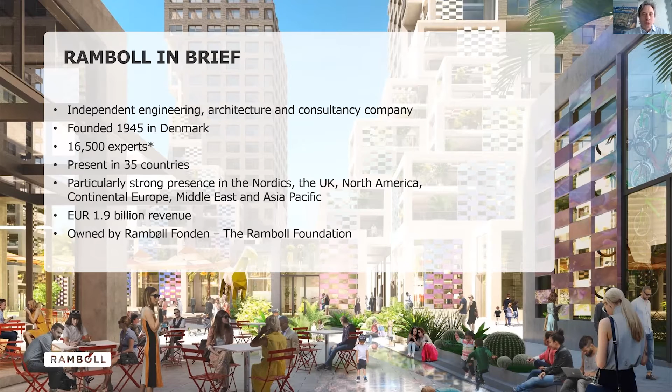And again, I'll just repeat what you said, that Ramboll is a company founded in Denmark in 1945, so 75 years ago. And we have then grown to many countries in the world. We are designing buildings and infrastructure for transport and for energy and for water. And we are working a lot also with the environment and health issues of the world. And we have a management consulting arm to help us with the business aspects of all these issues.

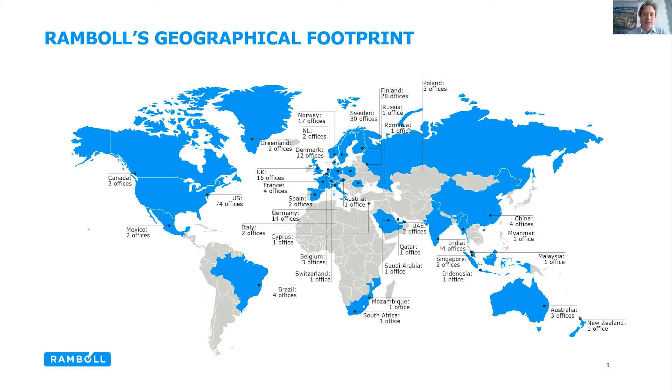I'd like to start by setting the scene. So when we design buildings today and for the last couple of decades, we have tried to do it as sustainably as possible. And in order to balance all the different aspects of sustainability, we typically use some of the certification schemes like BREEAM, LEED, or DGNB. And there are 40 or 50 other similar schemes around the world. What they do is that they list typically all the aspects of sustainability, which is different from country to country. So that's why we have so many different schemes.

And then basically in the design process, we try to achieve the best possible performance within each of these aspects. And then the scheme will give you points. And when you collect points at the end, you achieve a rating. So a rating of maybe silver, gold, or platinum, or whatever the different schemes are using as a rating. And this is really great.

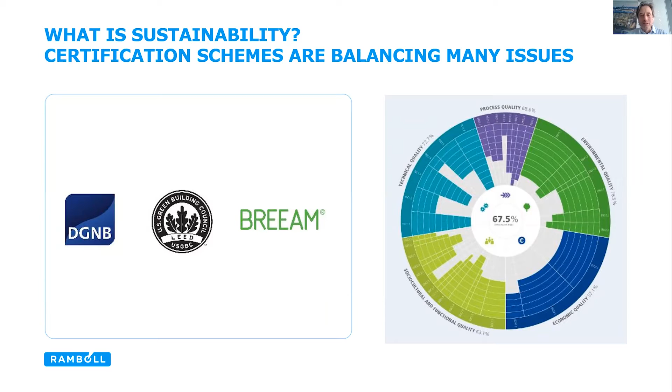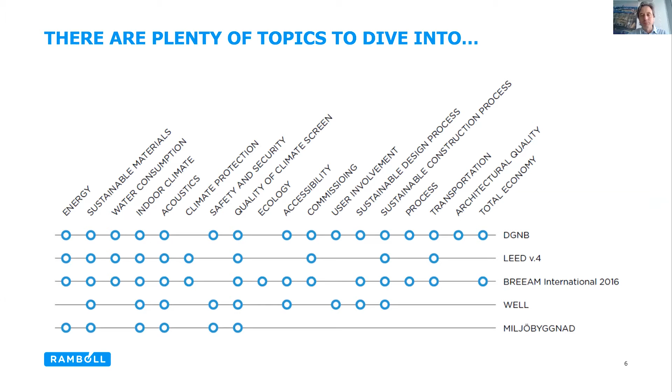You can see also on this overview that some of the schemes emphasize the environment. Others are more holistic and take everything, including social and financial sustainability, into account. So there is no one definition of sustainability because it changes from country to country, it changes over time also. And so we also know about the UN sustainability goals that were introduced in 2015. And again, these are for 15 years. I'm sure that when we reach 2030, it will be different goals that we will be focusing on.

Because, you know, when we focus on solving a problem, very often we succeed in solving that problem, and then we go to the next problem to solve, and then it's a different problem that is the biggest problem. So basically, in the 25 years of my personal experience of designing buildings, things have changed all the time. And we've had a decade of focus on operational energy.

We are now entering a new decade where we may focus on what we call embodied energy or embodied carbon. We will also focus on resources, so that's kind of the circular economy agenda. And we might, you know, in the future find other issues that are going to be more important than the ones we focus on at this time.

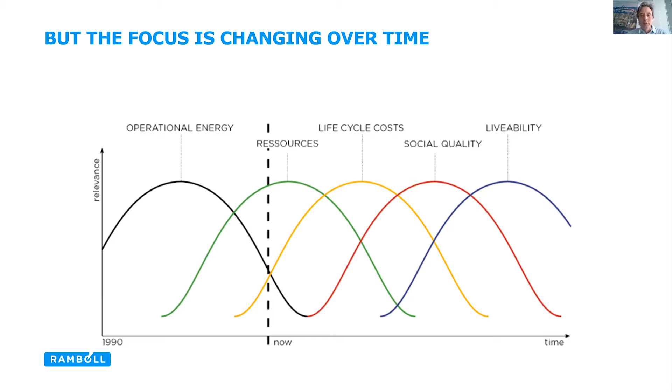So I ask myself whenever I start a new project, you know, what is it that is most important for the client at this point in time? And so we do this sustainable buildings market study every second year. We've just completed a new one, which will come out next week for all to read.

What it does is it asks a number of questions to more than 1,000 property owners that we work for. And then we ask them what is important for the time being. And what I can disclose at this point is that net zero carbon buildings, of course, is a very big topic. And I think that's what we are all talking about. This is what this webinar is about. But also what's coming up on the agenda is circular economy. As a second priority, a lot of talk in the EU about circular economy.

And if you look ahead, we do use a lot of raw materials, and also some of these raw materials are limited. So we really have to think about what raw materials we use in the future. Plus, we generate a lot of waste, and so there is an issue here that we have to focus on also, circular economy.

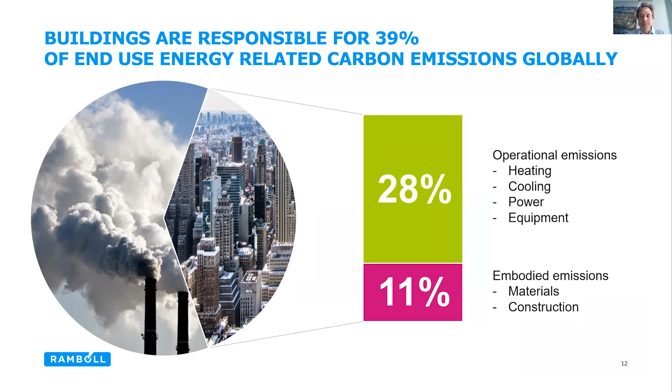The building regulation in 1961 was the first time when we actually set a maximum allowable energy consumption requirement. And then we had the oil crisis, and finally in the last 20 years, we had the carbon emissions, the climate changes and so on. So we had different drivers that drove down the operational energy use in buildings. And so for new buildings today, the building regulation of 2020 has what we call a nearly zero energy buildings standard, a very, very low energy use. And so we've almost solved the problem for new buildings.

But if you look at what we call the embodied carbon, this is all the energy that we use when we produce materials, when we construct and build the buildings, also when we change or refurbish components during the lifetime of the building, when we demolish the building, and when we recycle the materials. There's a lot of energy used and a lot of carbon emissions from that.

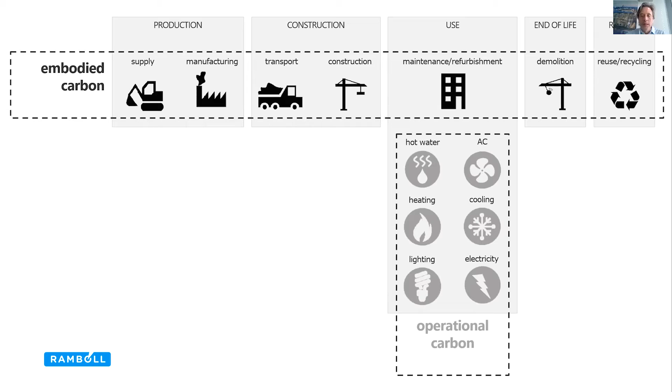So we've looked at all the emissions throughout the lifetime, and this is why it's important that we talk about the emissions per year, because if it's a 50-year lifetime, then we divide by 50. If it's a 100-year lifetime, then we divide by 100.

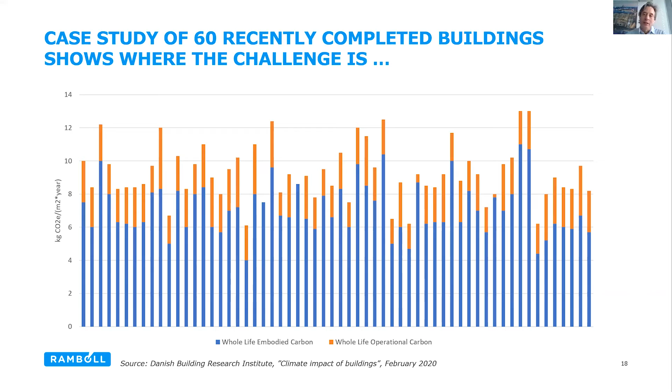I think what is most important here is that the embodied carbon, the blue color, is much higher than the operational carbon over the lifetime of the building. So the operational carbon, because of what I just showed you about building regulation and so on, is going to be very, very low for most buildings. So the biggest problem we have going forward is embodied carbon. And that's why we have to focus on that.

Another interesting aspect of that study we did last year is if you look at the lifetime aspect of these buildings, there's a lot of emissions in the first year, because this is where you manufacture the material, you produce the building components, and you build the building. So that's what is causing a lot of emissions.

And then, every 15 or 20 years, when you do an upgrade of something, maybe it's the mechanical system, maybe it's the internal walls or the facade, there will be additional emissions. And then at the end, when you demolish the building, there are also emissions. It all ends up typically between 300 and 500 kilos of CO2 per square meter.

But what you see here is that there's one building that stands out and that has a negative carbon emission flow, which is a timber structure building. That's because, the way we look at it, when we build with timber, we store the carbon that is absorbed from the atmosphere into this timber. So that's what we call sequestration.

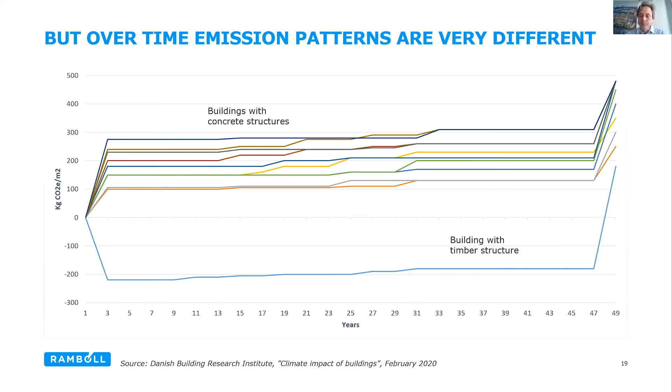If you look at the types of buildings that we have, it's almost the same. It's not exactly the same, but it is almost the same. So for whatever building, you can see here between 300 and 500. So it's not a very significant difference from one type to the next.

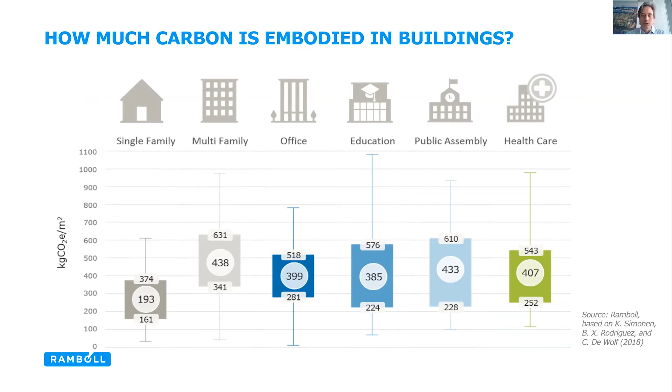What is interesting is in what parts of the building is the embodied carbon, where does the embodied carbon come from? Well, the majority comes from the structure, and because of what I just said, steel and concrete are the main emitters of embodied carbon. But of course, there's also steel and concrete in other parts, and there are aluminum and plastics and so on. So there are a lot of places where we can look.

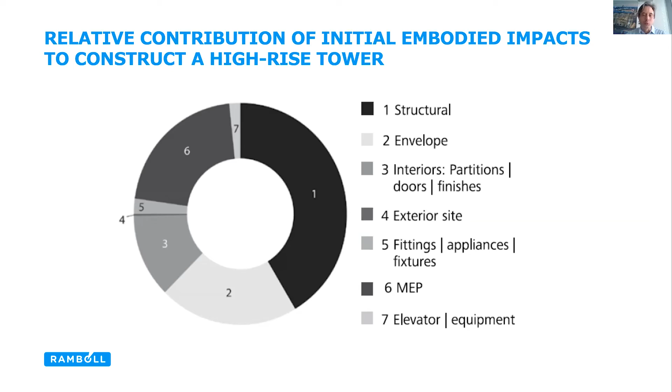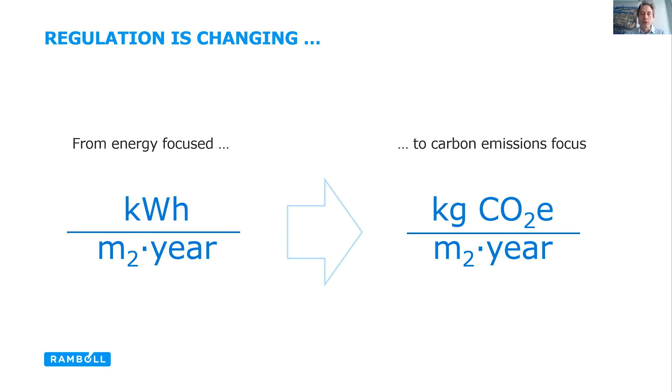So basically, the agenda for when we design buildings has changed. The political agenda has changed. We're no longer so interested in how many kilowatt hours per square meter per year a building is using, because energy is not so much a problem in the future. It's going to be renewable and carbon free and so on. What is really interesting is what are the carbon emissions? So how many kilos of carbon emissions per square meter per year? That's what regulation needs to address.

Two years ago, we worked with the World Green Building Council on a report where we laid out a roadmap until 2050. What is it that we can do to bring embodied carbon on the agenda, to make politicians aware of this problem, to make the whole industry, the designers, the contractors, the building material manufacturers aware? That is the big problem, and that's a report that we produced.

In the report, we suggested that by 2030, all new buildings, infrastructure and renovations will have at least 40% less embodied carbon with significant upfront carbon reduction, and all new buildings must be net zero operational carbon. So the orange part of the chart I showed you before must be zero.

The blue part must be reduced by 40% by 2030. That's a very realistic target, but we need everybody to help achieve that.

And then we said another thing for 2050: new buildings, infrastructure and renovations will have net zero embodied carbon, and all buildings, including existing buildings, will have net zero operational carbon. So that's the ultimate goal. That's the Paris Agreement, and any other agreement that has been made is targeting 2050 as the start of the zero carbon future.

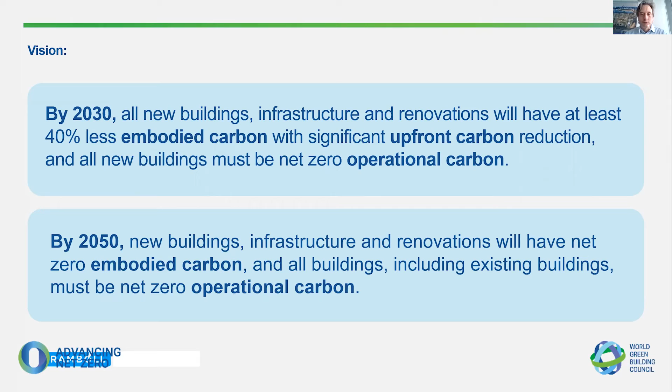We can, what we say, challenge the brief. That is, we can ask questions to the client about what he is building. Is it really necessary to build? Is it really necessary to build with those loads that he has specified, or can we do it in a better, less carbon emitting way?

And also, can we increase utilization of the buildings we design, so that, for example, if we design a school, it's not only used for a school, it's also used for something different in the evenings, so that we don't have to design so many buildings, so many square meters of space. We have to be very conscious what we build and stop building what is not necessary.

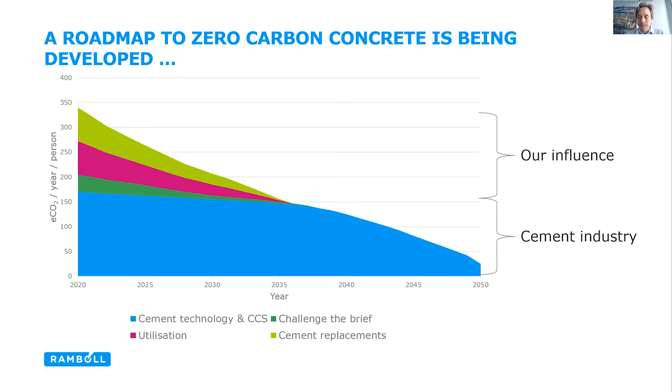And it is almost a one-to-one replacement of a concrete structure, which would be the traditional way. Especially in the Nordics, we use a lot of prefabricated concrete, but we can replace all of those with prefabricated timber, CLT.

So I want to just touch quickly on what is happening in different countries. This is going to be fast because I don't have the whole day. So Denmark is planning to introduce regulation in relation to CO2 emissions. There is still a challenge in terms of getting data: how much embodied carbon each material contains, and all of that has to be calculated and declared. So we have a couple of years to do that, and then the new regulation will go into force.

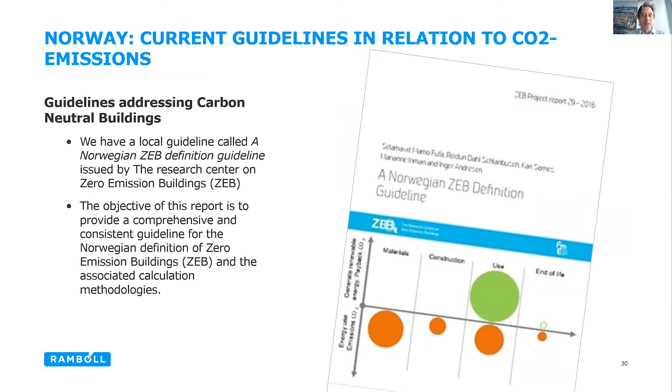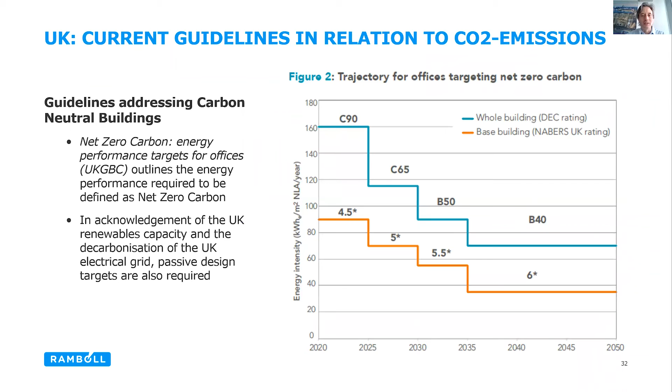It's the same in Finland; this is a new report that came out of the Finnish Environmental Ministry. We have it in Norway, the Norwegian Zero Emission Buildings Definition Guidelines. So a lot of guidelines are coming out. We have it in the UK from different sources. Here is an attempt to set targets for the next 30 years for embodied carbon, and the Institution of Structural Engineers have recently published a guideline on how to calculate embodied carbon. Again, you can do it in many different ways, so we have to be consistent, because otherwise we cannot set targets.

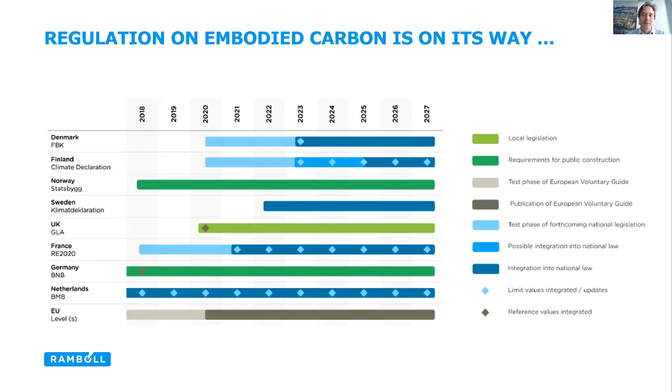And so if you look at it all together, there is regulation coming in almost every country. In the Nordic countries, where we do a lot of our work, in the UK, also in France and Germany, Netherlands, and so on. So we can expect, although it's not there as we speak today, that a lot of regulation will be in place over the next few years. So no matter if you want it or not, you really have to understand the issues of embodied carbon, how to calculate it, and how to minimize it.

What our clients are then asking, when we tell them about this, is: okay, how do I set a target? What is the appropriate target for embodied carbon in the buildings? And because of the constant reduction over time, these are some of the proposals already out there. If we're designing a building today, typically this is the British RIBA non-residential target. It would be about 800 kilos per square meter. And I think that is quite an achievable target. Most buildings, even if you don't do anything, would be able to achieve that.

We have a Danish building code where this is a regulation that we are expecting. The minimum requirement is going to be 600, and then there's an extra tough requirement for a voluntary sustainability class that is a little more than 400 kilos per square meter. And again, that will change every 4 or 5 years, because we will be coming down something in the order of 40% reduction over the next 10 years.

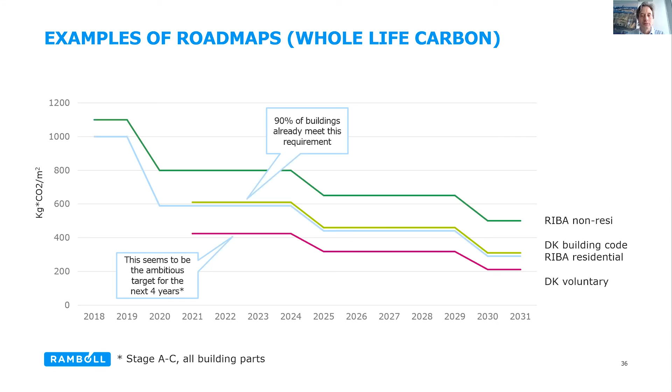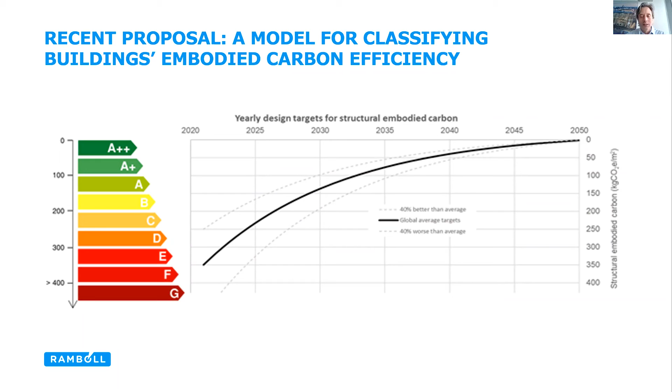There's another way to look at it, and again, this is still being discussed politically and in various fora. But we could also imagine that we would classify buildings according to a scale, A to G, in the same way as we do with energy efficiency. And then we say, okay, at the moment, a level F building is fine, but in 5 years, we would definitely expect to get a level D. In 10 years, we would expect to get a level B, and so on. So that's also another way to look at it, and we'll do that.

I think the most interesting thing is, for any client, to explain how we can actually reduce embodied carbon. And what we did was just to get a deeper understanding. We looked at 90 different projects we had made, and we then went back to see what concrete was used by the contractor, and we then mapped it on this scale to see the strength compared to the embodied carbon content.

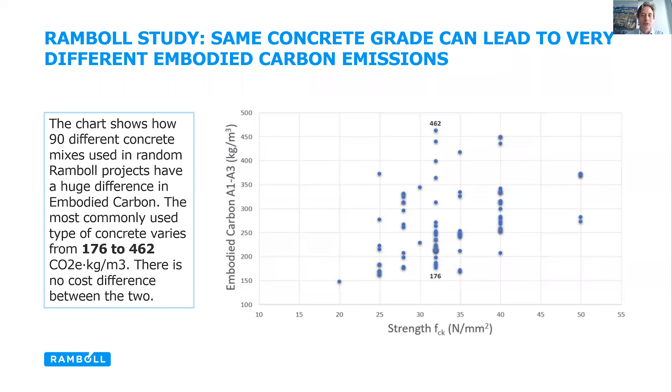And as you can see, the very typical strength is 32 Newton per square millimeter, but you can get almost a factor of 3 if you don't specify how much embodied carbon you will tolerate, how much you will allow. So it goes from 176 to 462, very random, on the same strength of concrete, just without specifying anything. This is what you get. So first thing is, you can actually reduce a lot by just specifying that the maximum limit you will accept is maybe 200, and then the supplier of concrete will give you that.

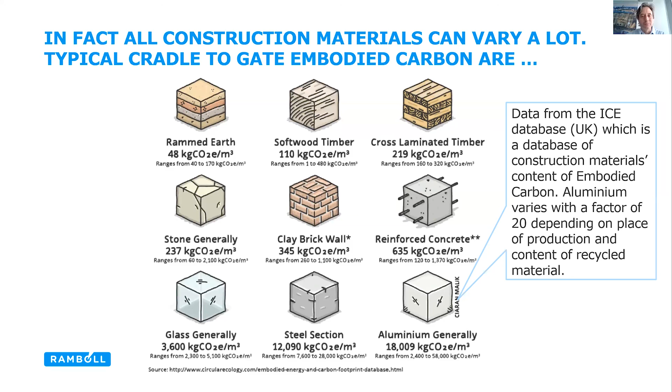There is a database in the UK. There's a database also in other countries of embodied carbon per material. But really, if you look at the data in there, it varies a lot. For example, aluminium, depending on whether it's reused or virgin material, can go from 2,400 to 58,000 kilo of CO2 per cubic meter. Same for the other materials. So it's not very helpful if you don't have the specific supplier and the specific specification of the material in mind. But as you can see, you can easily select material that is in the lower end, and then you can automatically get down.

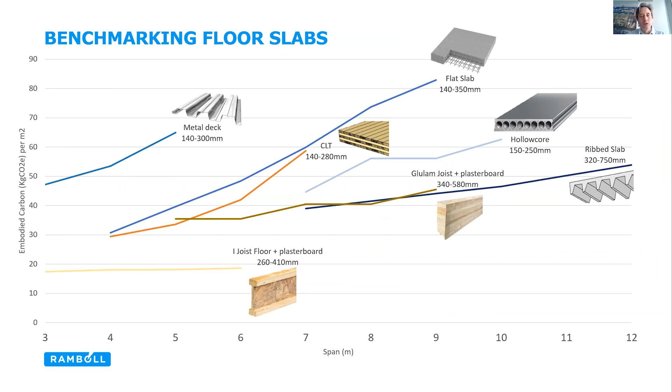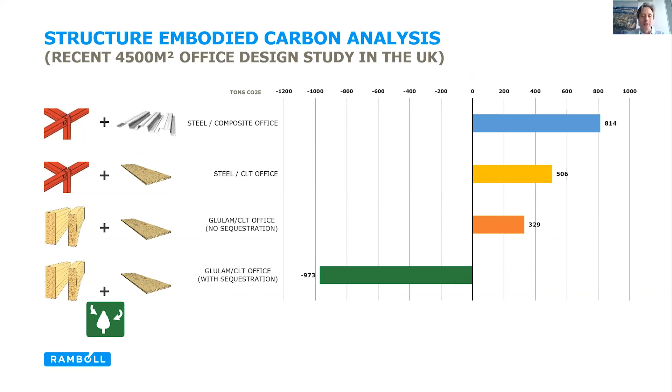You can also look at, when you design the buildings, what is the span, what are the different solutions for deck slab solutions, and then you can select, even within concrete or steel, different options that have a low carbon content. You can also select wood, of course, which has an even lower. I'm going to run quickly over these, but if you look at wood and you take the sequestration into account, then you will achieve a negative. On this slide, we have not taken sequestration into account. Wood is still the best option, but if you take sequestration into account, it's getting negative.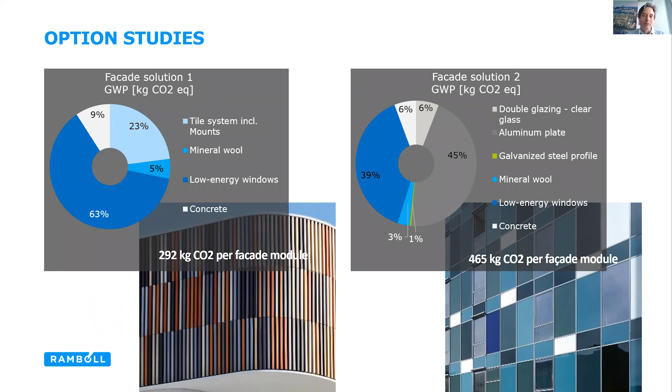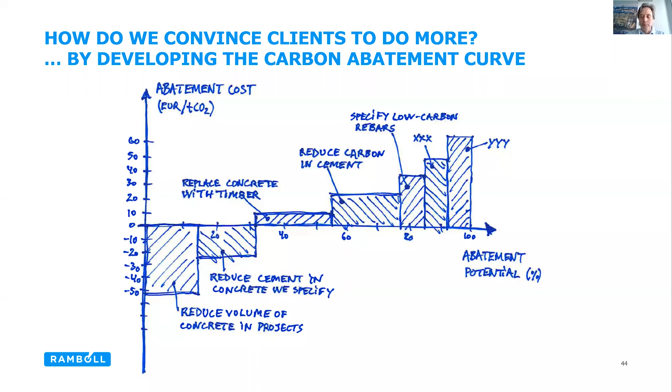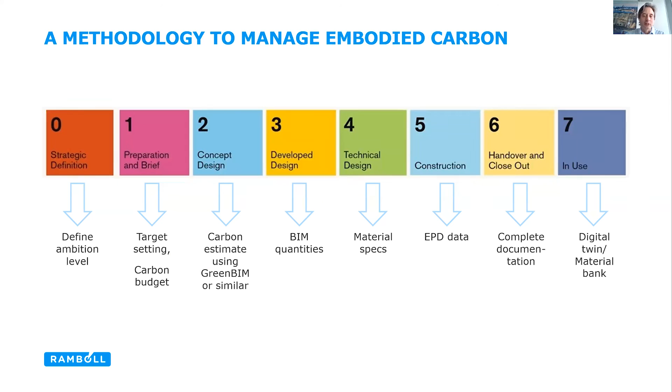And we have the design process defined. It's almost the same in every country. First, you have a strategic definition. You go to the design brief, and then you go through design stages. There's something you can do in every stage. So at the end, you can manage your carbon budget in the same way as you manage financial budgets. You already know how to do that. Every one of us is forced to do that. So I don't think there's a lot of challenges in also managing the embodied carbon budget.

You basically set a target, you benchmark what a similar building that has been built already achieved, and then you might be more ambitious. You make estimates in each stage, and then you do what we call value engineering. If you have selected materials and you find out, oh, I'm over budget, then you value engineer, you replace materials, or you do other things so it comes down on budget, and then it goes up again in the next design stage. That's the natural way that it works. And then you do value engineering again and bring it down, and so on. So that's how you would manage it. It's the same way as a financial cost budget.